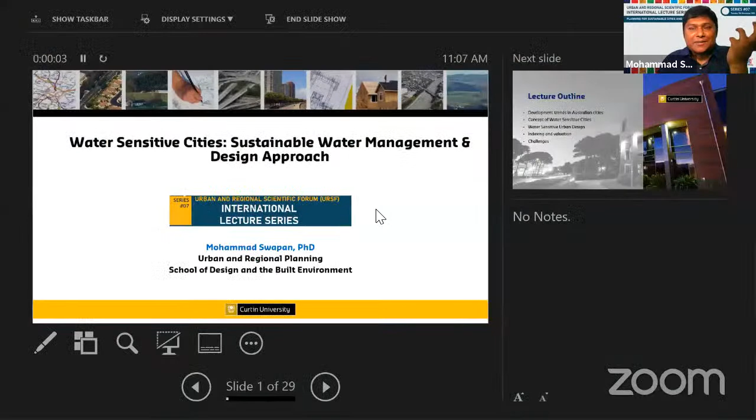I can only see the show taskbar, but there is no display setting in there. Okay, hide presenter view - that one. Yeah, you're floating, yes, that one. Just click it. Good, all right, okay good. Yeah, great, thank you. No problem. Sorry for the wait, all right.

Good morning from Perth, Western Australia, Curtin University. So as you already know, I'm Mohammad Swapan. I'm senior lecturer and director of graduate research in the School of Design and Built Environment. I teach in urban and regional planning, and by profession I'm also a planner. But I also have another role in the school to look after all the PhD students. We have around 88 PhD students in the school working on architecture, planning, construction management, and other disciplines. So I'm also coordinating the entire research degrees in the school as well.

I have keen interest in working on cities in Asian countries and also in Australian cities. My research interest is mainly around sustainability and disaster management and GIS applications in planning and decision making. So today I'll be talking about water sensitive cities, which is a very popular and increasing trend among planners within major cities in Australia to make the cities more sustainable and achieve the sustainability goals.

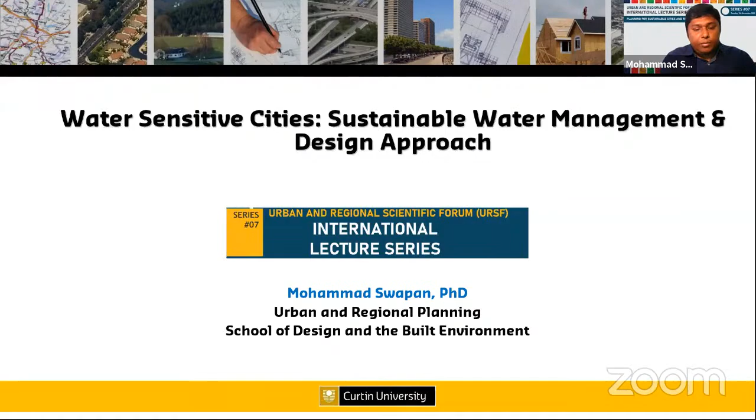Before I go into details, here's a bit of the lecture outline today. First, I would like to give you a bit of background on the development trends in Australian cities. That will help you understand the technology of water sensitive cities and the context and policies around that - background information about the cities and development we have here. Then I'll discuss the concept of water sensitive cities and different water sensitive urban design practices, indexing and valuation of the benefits we are getting from water sensitive urban design. And of course the challenges across the globe, including Australia, and probably how that can be meaningful in Indonesian cities as well.

So let's get into details. You're probably aware that Australian cities are very low density cities. If you compare with major mega cities in Asia, for example Jakarta, Kuala Lumpur, Dhaka or Delhi - the first graph on the right hand side, I tried a comparison about population density, and you can really figure out in the graph that Australian cities have around 300 to 400 people living per square kilometer area, and about 3.8 to 4.9 households per hectare, which is the lowest across the globe. Whereas in Jakarta you probably have around 13,000 people living per square kilometer, or 7,000 in KL, which is very high.

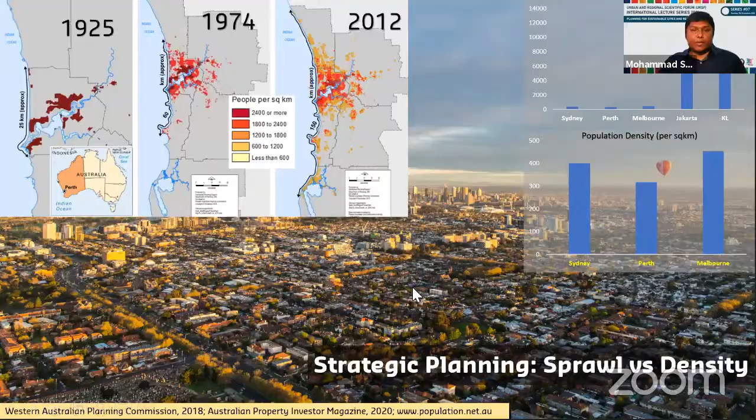A bit of background about the strategic planning - we had our first planning in 1955, and we've had a number of metropolitan strategic plans. The first three plans until 1990 in fact contributed a lot to low density development. But then we realized the environmental issues and planning challenges afterwards, and subsequent strategic planning, for example Directions 2031 and the most recent one, Perth and Peel at 3.5 million, are more oriented towards high density development. So now government is trying to achieve more urban consolidation and limit development towards the urban periphery.

Another planning challenge: 78% of the houses are single detached houses. People love to live in a single house rather than apartments, and they really want what we call the Great Australian Dream - having your own house with a wide backyard and enough space within the house. You'll see a lot of houses like that, so it's not diversified, it's very monocentric design. And more than three-quarters of the population are fully dependent on private vehicles.

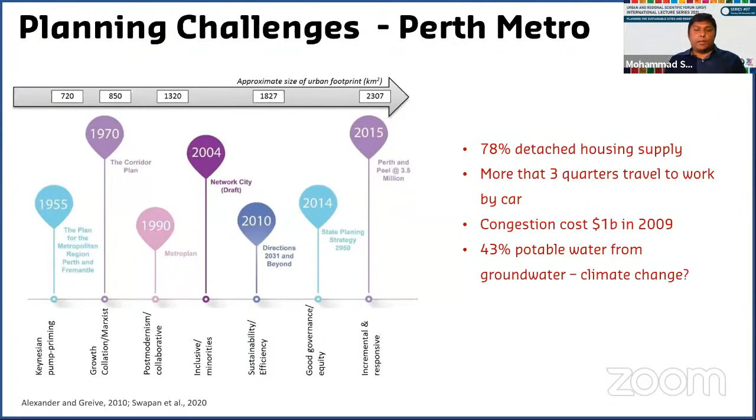The other problem is 43% of potable water is coming from groundwater. In the age of climate change, we are really concerned about this dependency on groundwater, because groundwater is depleting very soon, and we need to find out different options.

Every year we have this mismatch between supply and water demand. We really need to think about how we can address these challenges within the city, along with the higher dependency on groundwater—another challenge is to find more different types of water sources.

We have the overarching global planning agenda, like the New Urban Agenda and Sustainable Development Goals. It's not only the Australian government, but also academic institutions, planning professionals and practitioners trying to maximize the use of water and connect it with urban development. We can relate the issue of water to all 17 Sustainable Development Goals.

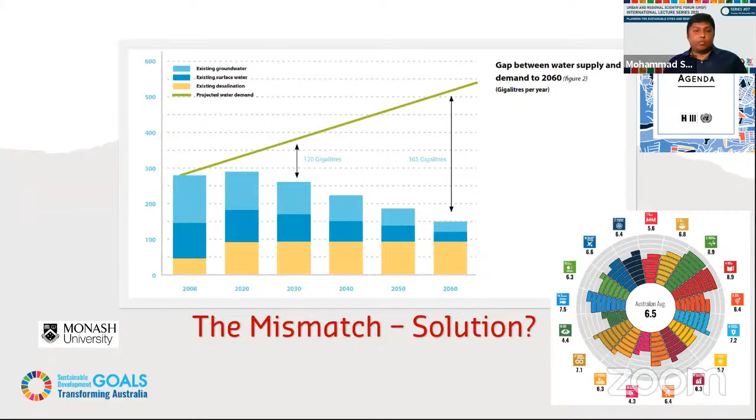But particularly, we are more concerned about SDG 11, which is sustainable communities and cities. We need to find out how we can manage this water in a better and more efficient way.

Water issues become very challenging and complex in an urban context. When there is more development, we end up with more impervious surface—more concrete—and a lack of places where water can penetrate the soil. This causes flooding and stagnant water within the city, which is really problematic in a growing city.

Another trend within the water management system is trying to remove stormwater from the community as quickly as possible. This is traditional practice—through drainage channels or sewage channels, we try to remove this water as quickly as possible.

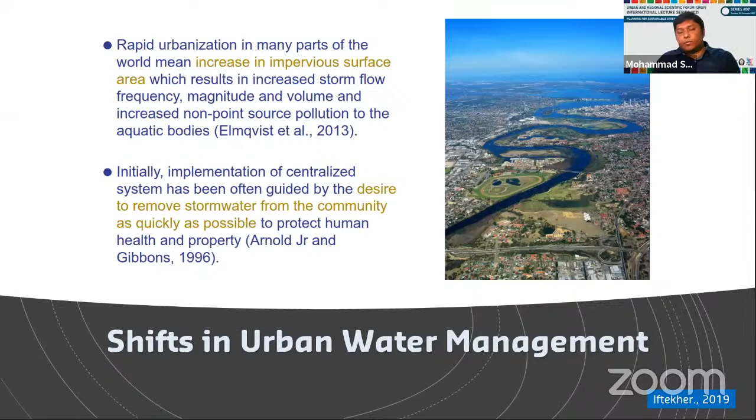But that comes with problems in the traditional water system. We have different examples and instances from different countries where sometimes stormwater or sewage water mixes with potable water and creates health problems in different cities.

What we have found is that conventional water management is more compartmental. One organization looks into the drainage system, another looks into the water supply system, completely different organizations look after urban parks and playgrounds, and another looks into urban development. These are all compartmental, with no interconnection between sectors—they work as silos, which creates problems.

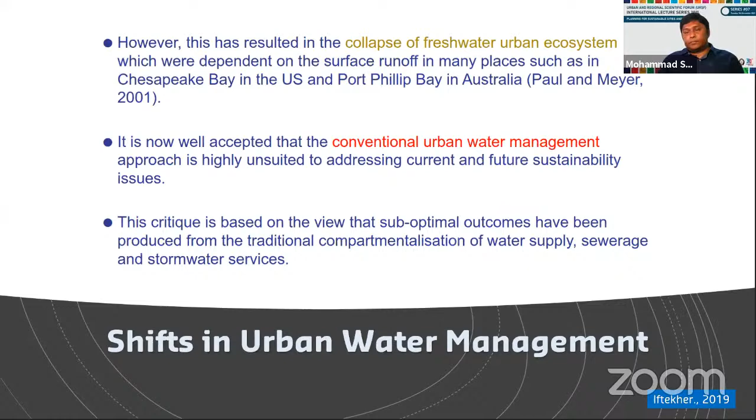Then as population grows, we think about the sewage system, so engineers focus on designing it. From there, we move into the drainage system—channelizing drainage facilities and so on. These are different aspects, and at the end is the aspirational target: water sensitive cities.

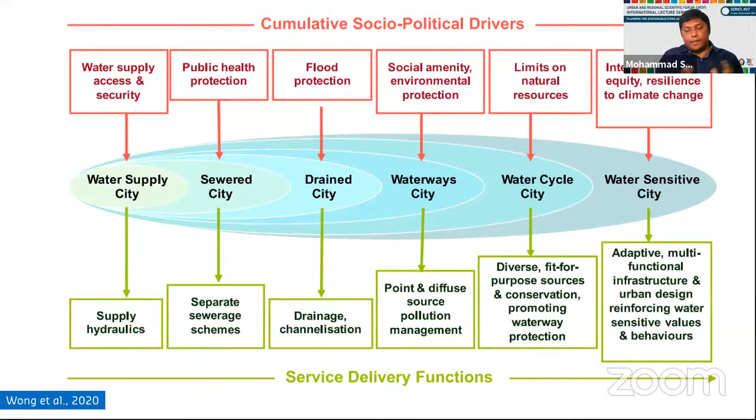Water sensitive cities is more like a vision, a goal, an aspiration—connecting all these, removing the silos and compartmentalization within the city. I'll give you some more examples coming up. The proposal, or concept, of water sensitive cities is that water needs to be connected with other components within the city, like urban parks and street trees.

Water is not a separate entity. We need to combine and connect everything together so we can achieve urban amenity, reduce the heat island effect, and have a more livable community.

For example, if you have a suburb or residential area close to a nice view of the river, you will get a higher housing price there. So people are willing to pay more in those areas.

So the aspirational target, the water sensitive city, needs to be livable, so it can create a livable residential environment. It can be more resilient, because it is connected with different options, so it contributes to the resiliency of the community. I'll give some examples as well.

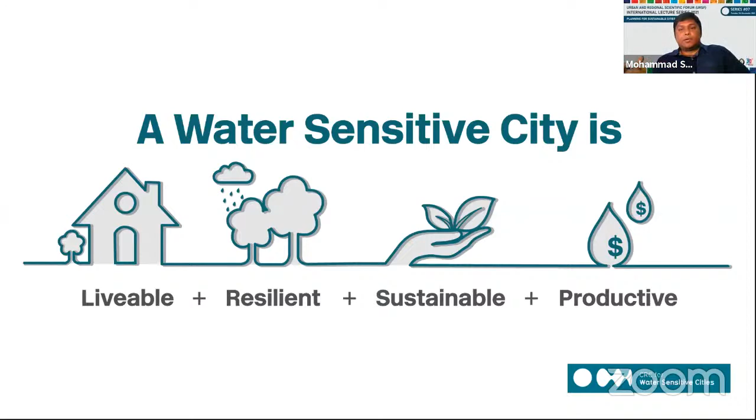More sustainable outcomes we can get from there, and it needs to be more economically viable, as I mentioned about the housing price. If it is not economically viable, then we really can't say that that is sustainable.

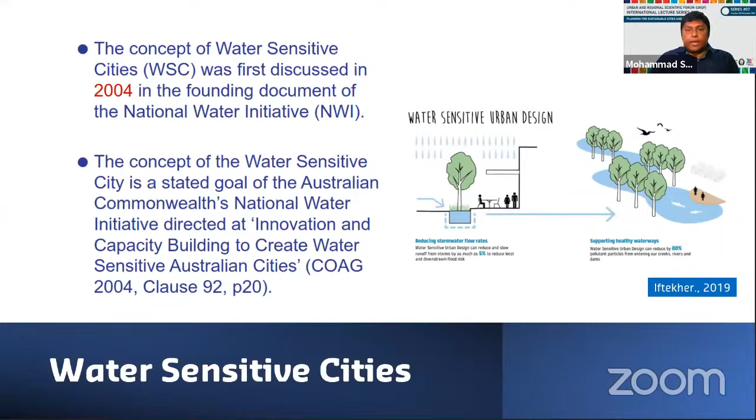The history of water-sensitive cities can be traced back to 2004, when the National Water Initiative document first discussed in Australia the application of water-sensitive urban design. Then we had more Commonwealth direction and more guidelines coming from different cities. Melbourne is very much ahead in the application of water-sensitive cities in Australia.

So basically there are three principles for water-sensitive cities. The first one is cities as water supply catchment, meaning creating more sources of water. For example, in Perth City, we are trying to increase the number of desalination plants.

We have some operational plants and we're also trying to increase the number. Another option could be harvesting rainwater within the household area, and finding more sources of water—basically reducing reliance on groundwater supplies. We know that because of climate change, we'll have less rainfall and see droughts more often, so if we can create different sources of water, that will make communities more resilient.

Another principle is cities providing ecosystem services—basically connecting water with the urban landscape. If you channel the wastewater coming out from households, recycle it, and channel it to urban parks to give water to the trees, that's how we connect residential areas and public open spaces, so those systems give more benefits of ecosystem services.

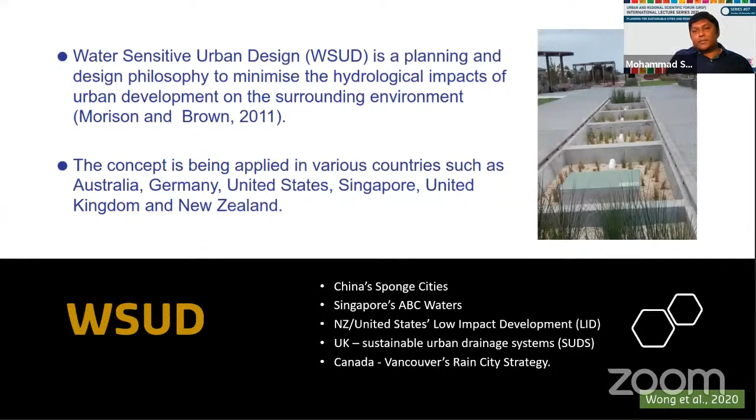There are different options and practices becoming popular, not just in Australia but across the globe. China has sponge city principles, Singapore has ABC Waters, New Zealand and the United States have low impact development, the UK has sustainable urban drainage systems, and Canada has Vancouver's Rain City Strategy. It's the same concept with different names, but the principles are quite similar.

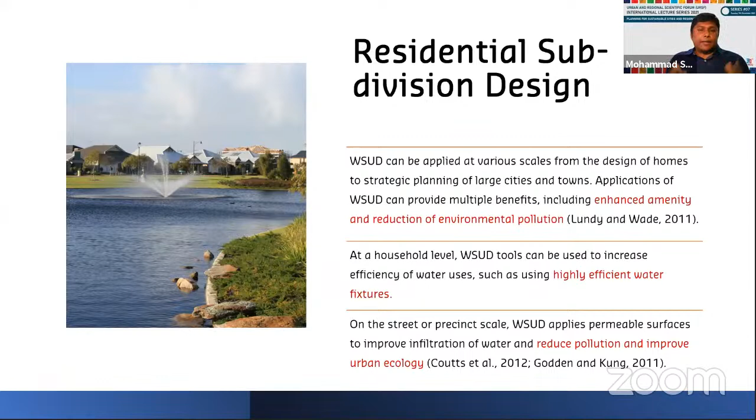In terms of the application of water sensitive cities principles, we have different scales. Within the community, for example, if you put highly efficient water fixtures in the home, you can achieve the first step of water sensitive cities goals. And if you connect the stormwater, recycle it, and use it for planting, that's another kind of practice we can apply.

In the next few slides, I'll talk more about different examples like water sensitive urban design and nature-based solutions. What are the practices currently being used in Western Australia? I'll give you some examples which might help explain how the different benefits, goals and objectives of water sensitive cities can be achieved.

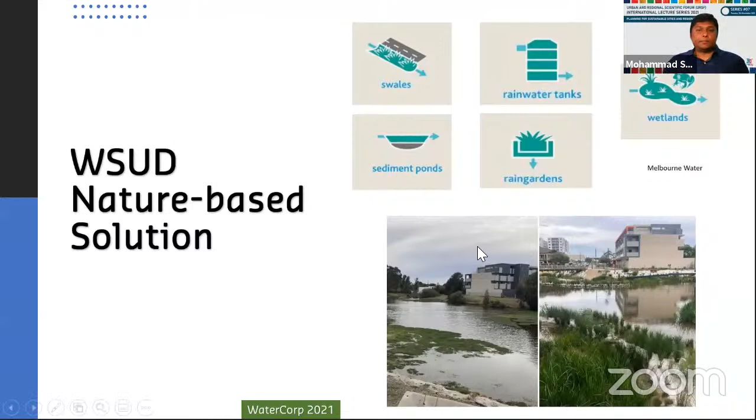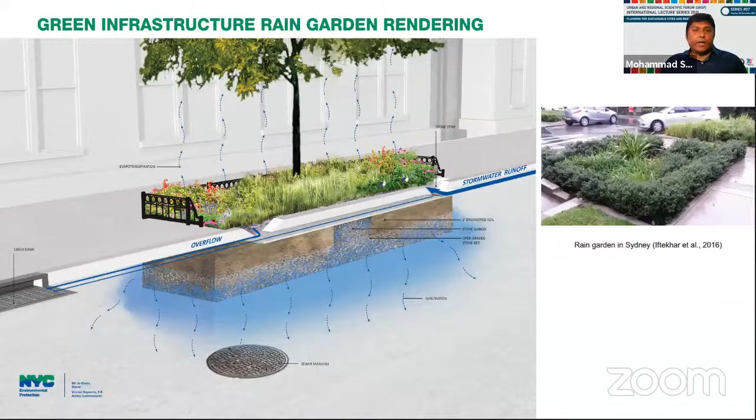The most popular one is called rain gardening. It's a small patch of garden found in the street verge or a corner of the street, planted with native plants or trees, with a filtration chamber underneath the surface. Basically you capture the rainwater, serve the plants, and channel the recycled water through the main pipe. This practice is getting very popular in many local government areas.

This is an example of an artificial creek - a kind of living stream created within the suburbs. It has a nice view, but it also adds value to natural biodiversity within the public open space.

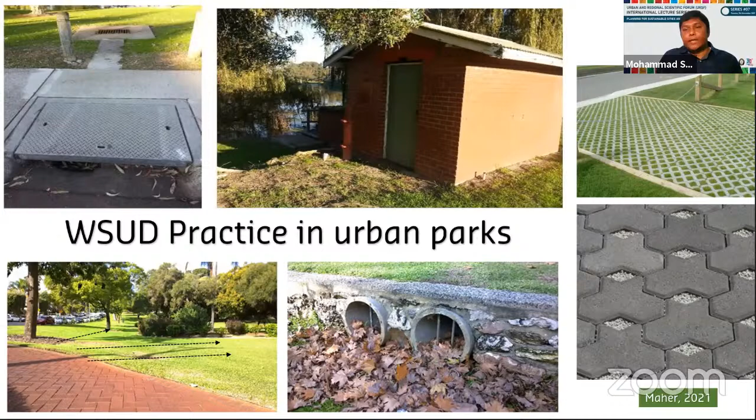Other examples are in urban parks - very common within parks and public open spaces in Western Australia. On the top left, you see pits and pumping stations helping to clean the water, and on the bottom right there are pollutant traps playing a big role in cleaning the water and trapping pollutants at the beginning of the process. You can also achieve benefits through pervious surfaces - creating pervious surface within parks or your courtyard is really helpful for achieving the benefits of water sensitive cities.

Another big example, a large scale project of water sensitive urban design, is called constructed wetlands. These are large scale and need the involvement of various organizations within the city - probably engineers, planners, botanists, and environmentalists - who need to work together to create this kind of environment.

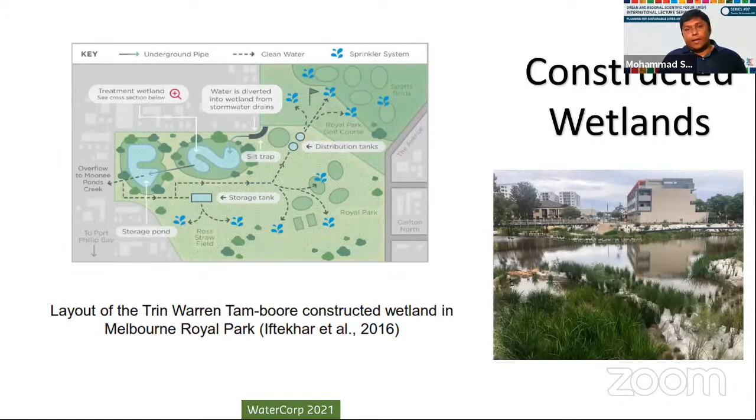The local council, with help from other organizations like water corporations and the Swan River Trust, undertook this collaborative project. They removed the topsoil completely in 2015, and in 2016 they artificially created a nice environment for native vegetation.

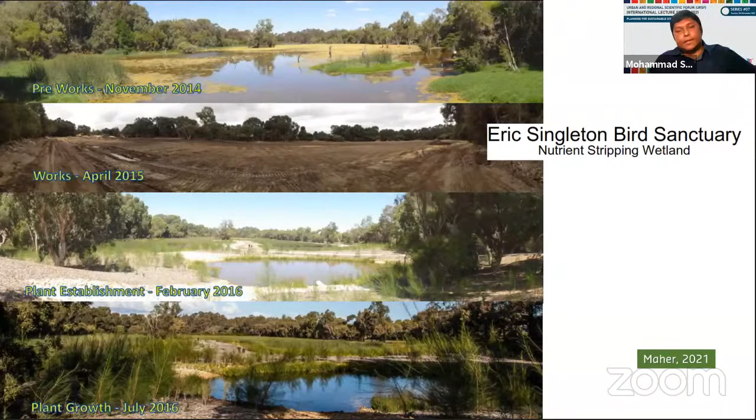It's like a natural gradient where wastewater coming from households is recycled through the natural filtration process and then goes to the Swan River. This is a big scale project demonstrating the nutrient stripping process to achieve clean water.

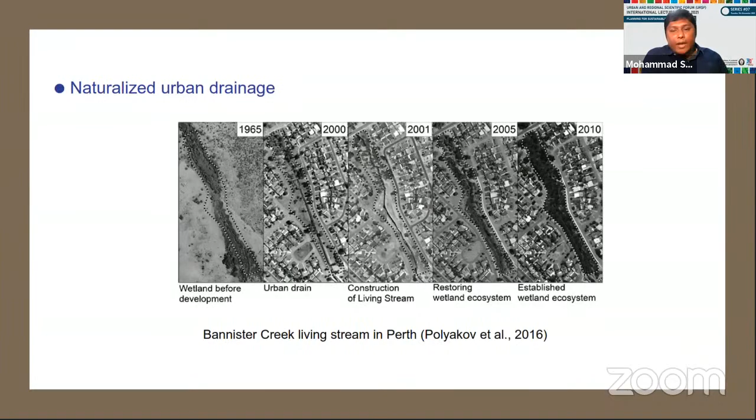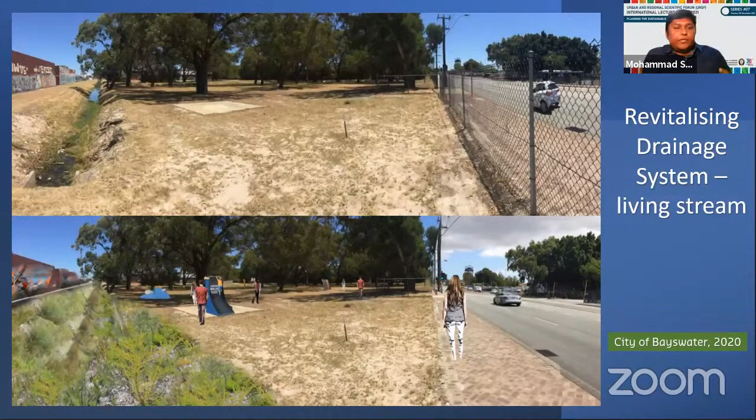A very recent example from the city of Bayswater: this is a revitalization of an old drainage system. They created a park, which is like a pop-up park, also called Ninja Park. The old drainage system is now full of native plants, with walkways around it. This gives an idea of how we can convert derelict sites into a very nice environment through the application of water sensitive urban design practices, creating a living stream from a very old drainage system.

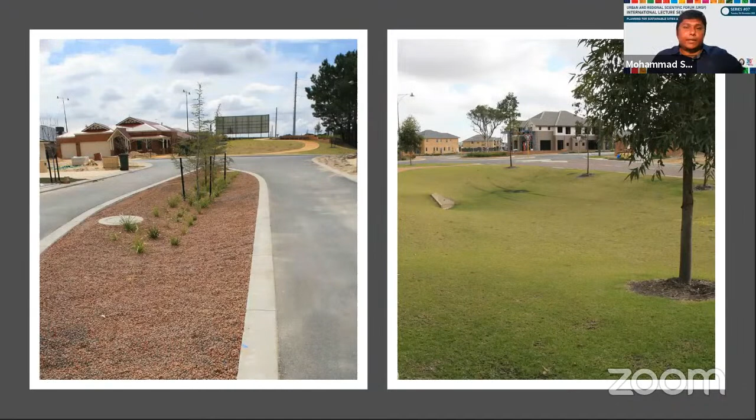These are a couple of examples from Perth suburbs showing how we can create pervious surfaces in the urban area, and also how we can channelize the rainwater in different places.

While this is a popular practice and local governments and engineers are currently practicing different sorts of water sensitive urban design, cities are also competing with each other to achieve the objectives of the water sensitive urban design goals. We have identified 7 indicators to see how different cities are achieving the goals of water sensitive cities, including ensuring good water sensitive governance, how government and organizations work together, increasing community capital, equity of essential services, improved productivity, and so on. I won't go into details since I'm aware we're running out of time.

To give an example, recently from a national project, Water Sensitive Cities, we got a comparative picture of different cities and the extent to which they have achieved the water sensitive goals. With these 7 indicators, we have a spider diagram nicely showing how far the cities have achieved this.

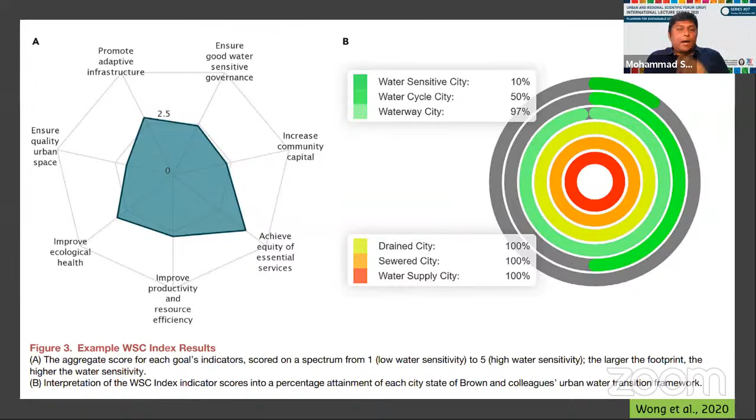If you remember the first heuristic water sensitive or water transition framework I showed you, from the sewer city, drain city, and coming out from there, we can see how the city is performing. For example, using this framework, we can say that Perth is probably currently sitting in the waterway city or water cycle city stage. It's still a long way to go to achieve the indicators of water sensitive urban design, water sensitive cities. This is a nice way of indexing or comparing cities, and you can find out where your city currently sits in this framework.

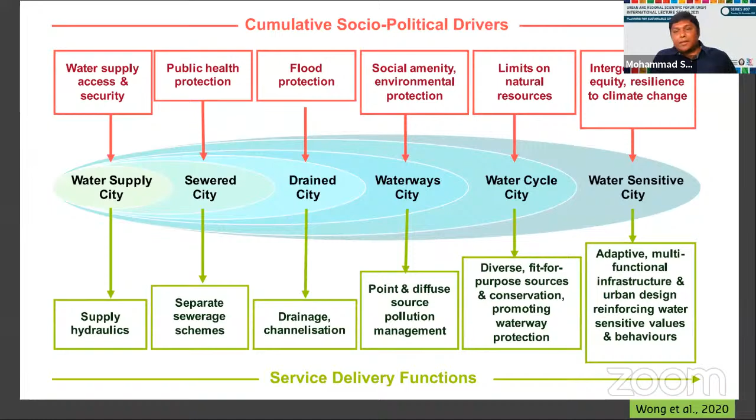So the question is how we can assess the benefit we get from water sensitive urban design practice, because you are getting amenities, and that is more qualitative. If you spend half a day in a park, you can't really say 'I've got $2 of happiness from there.' These are non-market values, we actually can't price those values. So we need to find some kind of assessment tool through which we can measure the benefit coming out from water sensitive urban design practice.

We have mainly two different types of assessment approach: one is called the revealed preference method, another is called the stated preference method. The revealed preference method identifies more visual, identifiable benefits, for example housing price, which we call hedonic analysis. If you look at housing price data over the last 5 or 10 years, and compare it, you might find that after a successful water sensitive urban design project, housing prices have gone up by 2% or 5%. From this revealed data, you can say we have achieved something through these practices.

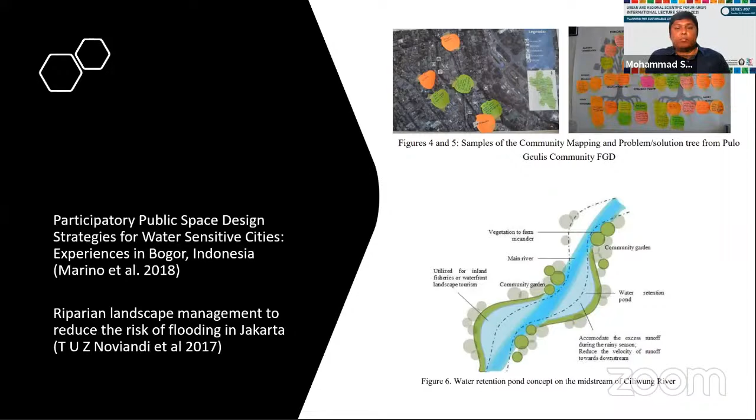The first hurdle is bureaucratic misalignment. We have many organizations with overlapping responsibilities, but we also have silos where we don't talk to each other. Maybe engineers are working by themselves, maybe planners are working by themselves, and we are not talking to each other. So we need to find a way to integrate, have a more collaborative way, and reduce the red tape in the bureaucracy.

Because it's not only about managing hard infrastructure, but also livability and soft infrastructure within the community - it's about resilience. So obviously we need to find more options for how we can create more integration and collaboration, and also community-driven ideas and concepts within the planning system. I think that's very important if we want to really achieve the goal of water-sensitive cities.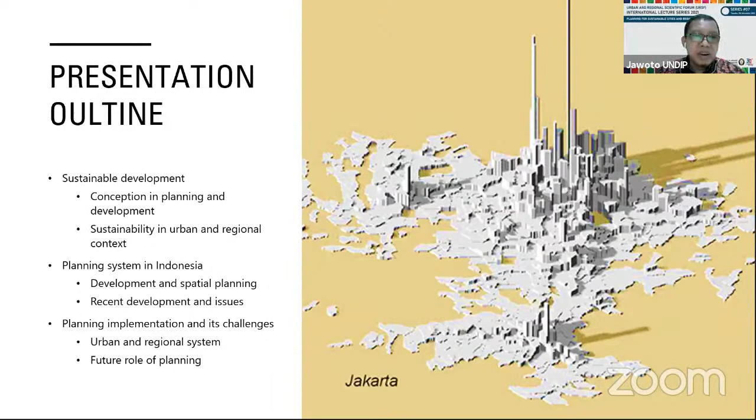We may recall that the original concept of sustainable development came from the Brundtland report, which stated it as the ability of humanity to ensure that it meets the needs of the present generation without compromising the ability of future generations to meet their own needs. It's quite a broad concept, and it has ignited much interpretation, discussion, and debate, especially in the context of planning, because some say that planning is essentially sustainable development itself.

In the planning context, sustainability can be divided into two streams or two main questions: are we planning for sustainable cities and regions, or is it just sustainable planning? But we are not going to discuss this in more detail.

But the latest discussion in this subject widely offers the need for indicators in relation to other development concepts like livable cities, resilience, and the latest paradigm combining resilience and sustainability. Behind that discussion, in fact, the urbanization process has become one of the major global challenges at the moment, especially in the cities of the global south.

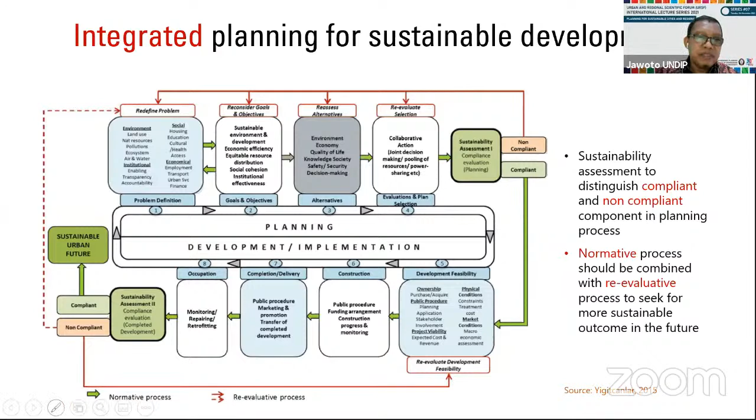Integrating this normative process with something he called non-compliant evaluative criteria, in addition to the compliant evaluative criteria, which is derived from the sustainability assessment. So we will have an integrated planning process by combining criteria of sustainability with the normative planning process. This is the framework proposed by Yigitcanlar.

And then I also found two interesting proposals. The first one is from Mike Douglass. He studied the urban system composition in Indonesia, and this is a unique characteristic that we have in Indonesia because we have what he called the cluster urban system.

So actually, in Indonesia we hardly have what theory describes as the hierarchical model of urban system. This hierarchy was used by many scholars to propose growth pole models based on the composition of core urban regions, with the core urban region surrounded by secondary cities, and secondary cities surrounded by third-tier cities, and so on. So the factual condition in Indonesia makes it difficult to apply this kind of concept.

So Douglass proposed what he called the cluster or network urban system planning, and it is also in line with what Roberts proposed about the corridor of development, especially including the development of secondary cities.

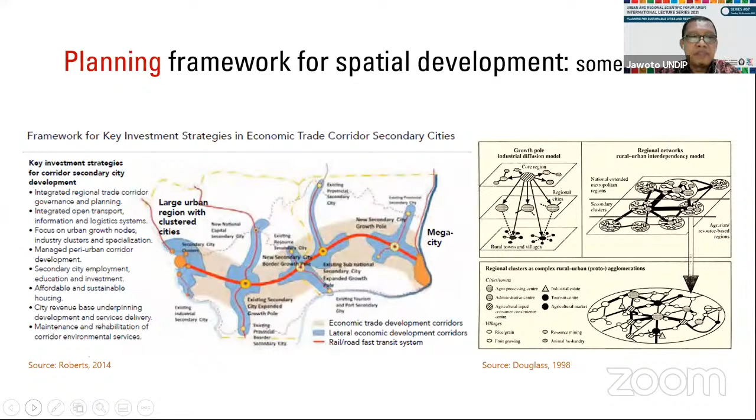So it can create corridor development in the near future, and that corridor development will benefit not only the development of large cities, but also smaller urban areas. So this is the conceptual framework that we can consider as a theoretical background to implement the sustainability principle in urban and regional planning.

Now I will be presenting, very briefly, the current planning system in Indonesia. If we discuss the planning system in Indonesia, we must mention two different systems. The first one, we call development planning.

Development planning is part of the change made by the national government after the end of the Suharto administration, which was in power for more than 30 years before it fell in 1998. It was not a continuation of the previous system, but rather an improvement of the old system.

by having some planning documents that integrate the needs of the national government, provincial government, and local government. And the new planning system was also based on the new paradigm at the time, which introduced strategic thinking and planning, because all the planning documents are initiated by vision and mission statements at all levels.

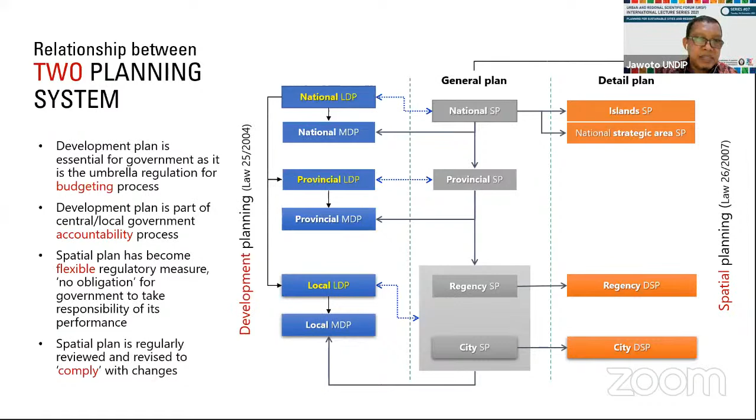Now, the content of sustainability concept in the planning system. It is interesting that recently both the development planning and spatial planning system have started to adopt the principle of sustainable development.

In development planning, by the implementation of presidential regulations in 2017 about the implementation of sustainable development goals, and based on this presidential decree, local and national government should formulate the action plan of the SDGs. And not only that, there is also an obligation to integrate SDGs indicators into sectoral development policies and programs.

At local level, it goes even further in the development and adoption of the sustainability concept, because the Ministry of Home Affairs regulations in 2018 require that every formulation of medium-term development plan at local level should adopt indicators of sustainable development goals. It is a new development.

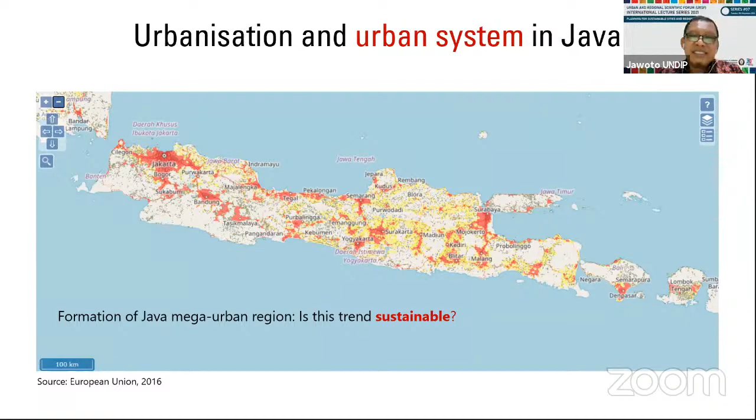Looking in more detail within the regions, I take this example from Central Java - we call this area the Joglo-Semar triangle, that links 3 major cities: Semarang in the north, Yogyakarta in the south, and Surakarta in the east. This is the urbanization trend in this area, and this trend is now even higher, because there has been massive infrastructure development linking these 3 cities.

Now there is a commuter rail system that connects Yogyakarta and Surakarta, and the construction of a toll road linking Semarang and Yogyakarta, as well as Yogyakarta and Surakarta, is now underway. The new Yogyakarta International Airport is now also linked to Yogyakarta city by railway train. So in the next 2 or 3 decades, this triangle will be as important as Jakarta and Bandung in Indonesia's urban development.

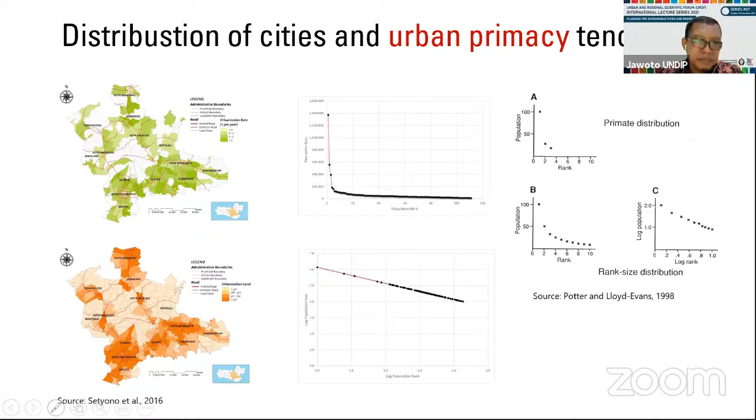And if we look even further inside a single city, we know that a city like Jakarta has been growing very rapidly. The latest growth of Jakarta is supported by the government policy to construct a new toll road that links the internal ring road in the city with the outer toll road outside the Jakarta area.

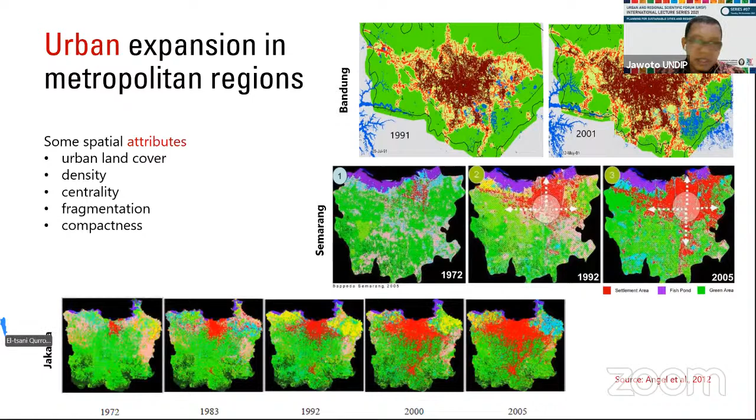So there is a question about the effectiveness of spatial plans to regulate spatial development at various levels in Indonesia, and the response is still the same.

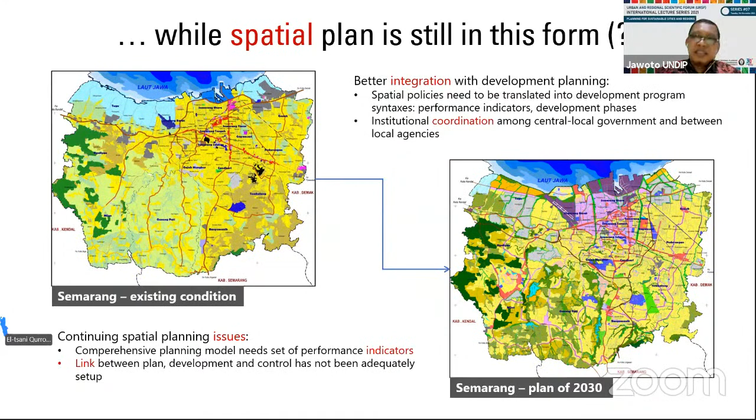Yeah, it's very fruitful slides and presentation. I'd like to make a little wrap-up about the two presenters today. Very interesting with Dr. Swapan about great Australian dreams, the shift in urban management, and the water sensitive urban design concept into reality and how it works, and how we live with water in the city. And from Pak Jawoto, we have many perspectives about the Indonesian planning system. Several things about how the spatial plan and the development plan in Indonesia are not integrated with one another, and this is our big homework to deal with the challenge in the future to make it effective.